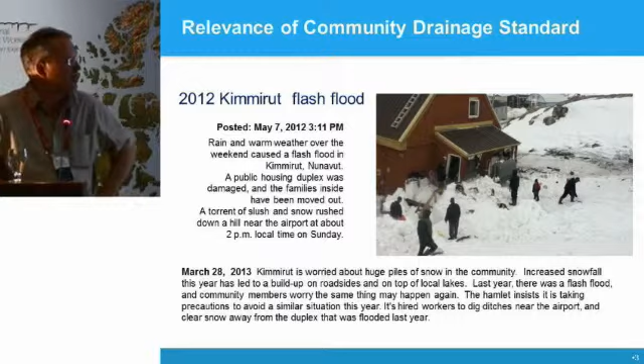But what do we have in terms of drainage systems today? I was fortunately involved with a climate change project in Kugluktuk and had the opportunity to wander around town for days, looking - the engineering side of me - at the drainage system in detail. Kugluktuk has rudimentary drainage in terms of ditches and culverts, but those systems are in various stages of disrepair. So I think it's important to this overall element of drainage that you have the planning and design, but the maintenance will actually dictate the success of this program.

That's why we're developing this standard. We expect the standard language to be this thick and our appendix to be that thick, recognizing that the pullouts and additional supplementary information we can provide to community maintainers will dictate the ultimate success of this standard as we're envisioning it now.

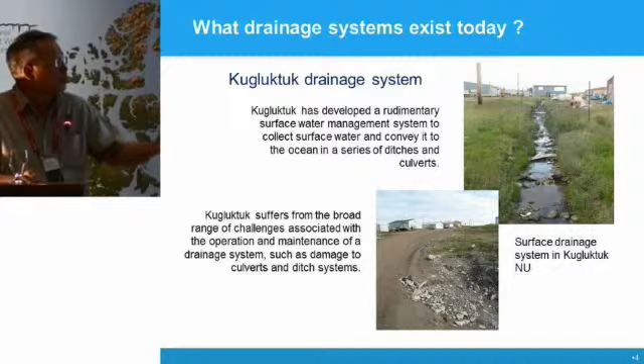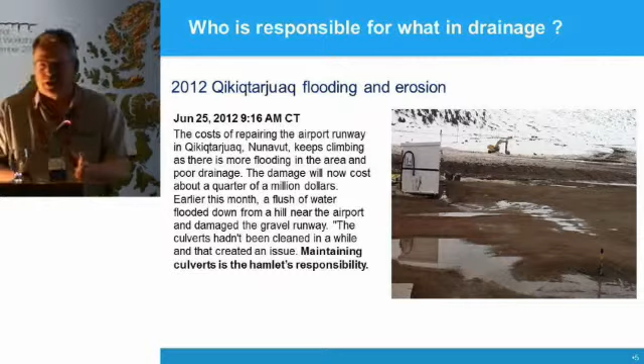But this goes to show in terms of who's responsible - Qikiqtarjuaq flooding and erosion back in June of 2012, they had issues with flooding, talking about damage in the range of $250,000. So regardless of how planners and engineers are involved, it comes down to the community being responsible and having the long-term responsibility for maintaining and improving that drainage. I think that's key to the whole success of our exercise.

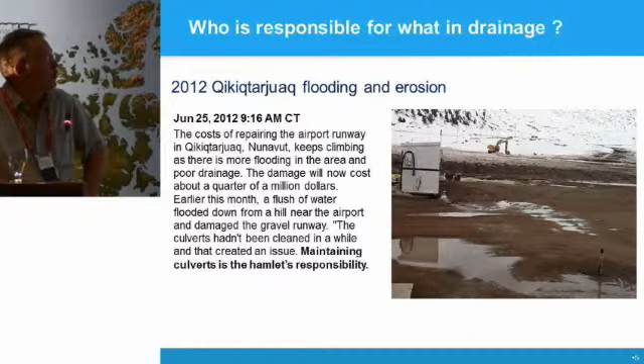So for operation and maintenance - these are shots from around Kugluktuk showing things such as plugged culverts, drainage channels or ditches that are improperly maintained, culvert ends - this is standard stuff. These are the elements we're looking at in terms of trying to bring forward the planning side, which community planning is a fairly well established exercise in most northern communities.

Most northern communities have a community plan that has drainage elements in it, and these plans are updated quite sporadically, but drainage is inherent to them. Now we're trying to take that information, that element, and bring it forward to a new level where you've got information available in the context of a standard.

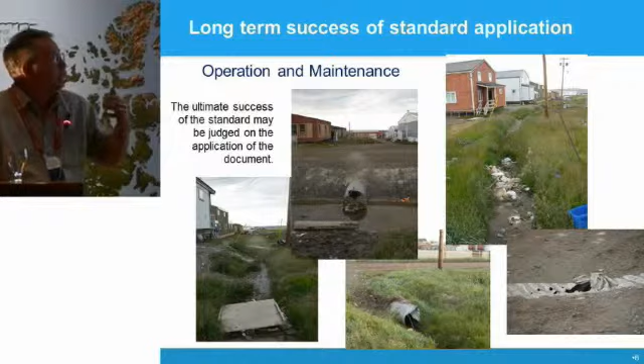As I was saying, there's an integration of existing information - this is the community plan for Repulse Bay in Nunavut, and drainage is a standard part of the language within the community plan. But as we've been talking about, and this was one of my fundamental interests in coming here, is the terrain hazard mapping and satellite imagery that is now available and becomes a tool.

This was part of our learning curve in this process - saying, okay, what do we need in terms of drainage planning and design? The classic approach is let's do a topographic map of the community, send surveyors in to collect sub-centimeter topographic information we can use in the design. But now we're bringing in other elements - what about the permafrost areas or areas prone to erosion? How do we bring those elements in without a significant geotechnical exercise? Well, we've got the imaging now that I think can bring those elements into play.

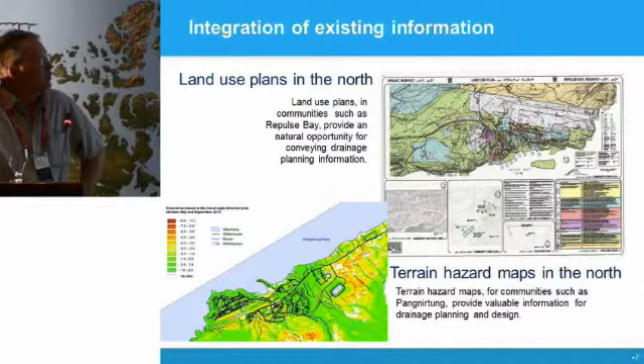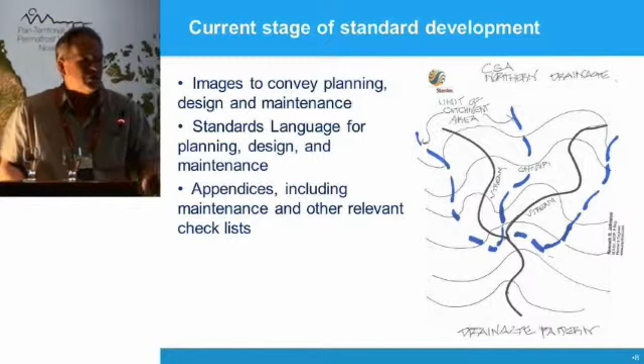So this is really the tail end, and I think I'm pretty much on topic. Coming together with our group, we had the opportunity to meet here in Yellowknife back in August, and we have such a broad range of planners, engineers, and maintainers. We came into the room, we had a draft, and by the end of it, we'd pretty much thrown out the draft. We're not starting from scratch, but we certainly learned in terms of what we're trying to do with our standard documentation and what information we really want to include.

So as it stands now with our committee, we're focusing on imagery to convey the planning, design, and maintenance. Very important, and I think this is where the planning element is, that from a planner's perspective we have to be very, very visual. We want to convey that in terms of understanding and conveying the message. We want to make sure the standards language for the planning, design, and maintenance is appropriate to the actual standards within the CSA context. Again, very important, and we're working on that.

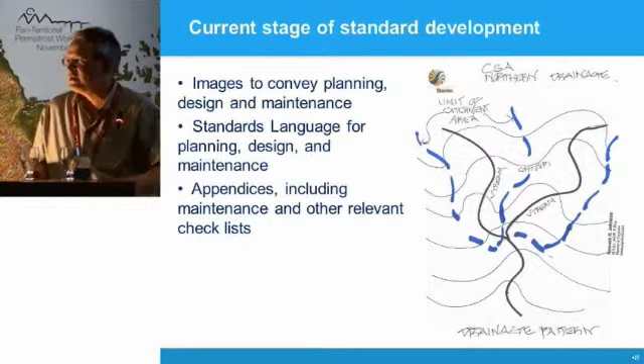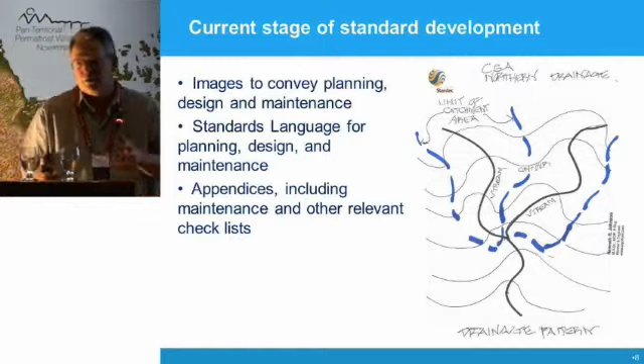But I think where we're really concentrating, or a lot more energy will go, is in terms of the appendices and a lot of pull-out stuff, maintenance and other relevant checklists. And this is where I'll plug - if anybody has any ideas that have just come to mind right now, we would certainly appreciate that input. As we're finding out with our various committee members, we had a drainage standard that one of our committee members brought out, I think for Fort St. John or Fort Nelson, and we had a look at it in the last 10 days and we want to include this as an actual usable document in the standard.

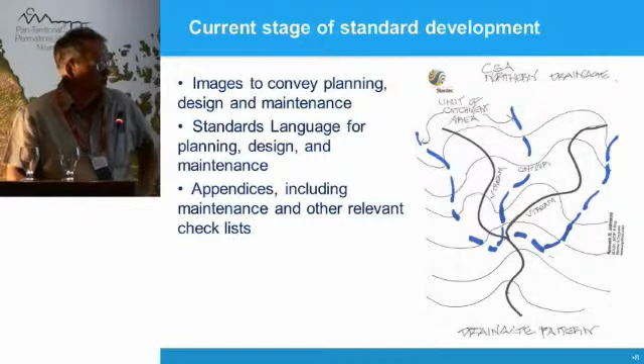And I certainly would like to acknowledge our committee members: Dennis Althouse with the GNWT, Jack Bowers, Yukon Government, Bob Chappell, GN, Ed Cormier, GNWT, John Clark, Williams Engineering, Greg Cousineau, GNWT, Scott Lamoureux, Queens, Ian Robinson, a planning consultant in Whitehorse, and John Watson with the GN. Some of those gentlemen are here today. I won't embarrass them by standing up. And thank you very much for your attention.

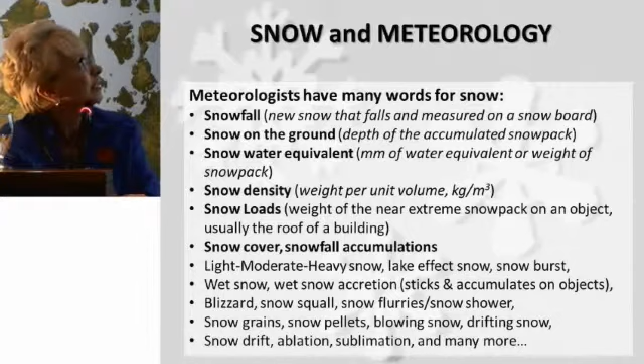This standard has to dance very nicely with the National Building Code of Canada. The National Building Code of Canada is usually adopted by the territories and the provinces, and it gives the specifications for the design of new buildings, brand new buildings.

This standard is dealing with another type of issue. It will have two annexes in it that deal with what to do with the fact that the snow is changing, and is changing quickly. What to do when you're designing new buildings, because that building has to last for 30, 50, 70 years, so you don't want to have it fail on you early.

So this standard is going to focus, though, more on existing buildings. What do you do with those buildings that were designed at a time when the weight of the snow was less, and now it's increasing? How do you protect lives? How do you make that building last a little bit longer? And when should you get up on that roof and take the snow off?

There are two snow terms we're going to use today. One is ground snow load. What engineers typically do is look at the weight of the snow that's on the ground, because that's sort of a constant. Then they use different factors to adjust it for what that snow should do on a roof, because every building's different. Every part of the roof can be different, and the wind can blow the snow around a different way.

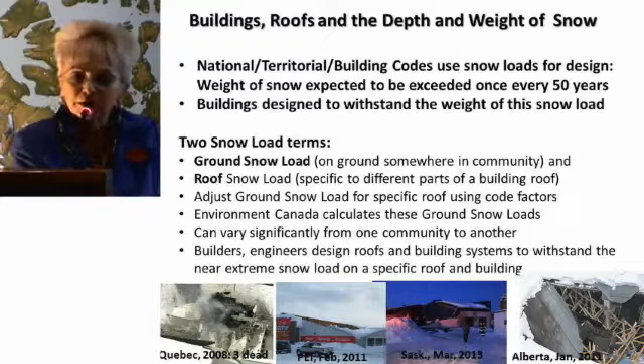Typically in the north, snow has been dry and wind-packed. Not happening anymore in a lot of locations. The snow and the maximum weight of the snow are behaving a little bit like it does in, say, parts of the prairies or parts of southern Canada. It's coming more in episodes now. Snow comes and it goes, and it changes more during the season, perhaps, than it did before, or not as consistently.

So we know that the snow depths are changing in some locations, but not all. They're increasing. Pretty much snow is increasing most places when it comes to extremes. The accumulations, the amount that gathers over the season, the greatest depth you might see is also increasing in some regions. The densities are going up, particularly in the southern parts. The depths are often going up more in the northern parts of the Arctic. As I mentioned, the rain on snow is increasing, but the length of the snow season is decreasing.

And we typically hear the snow cover is decreasing. That means the length of the year we have snow on the ground is decreasing. So people hear that and they go, oh, good, no problem with snow. No, the means and the different characteristics can vary in different directions. But the things that matter for buildings are increasing.

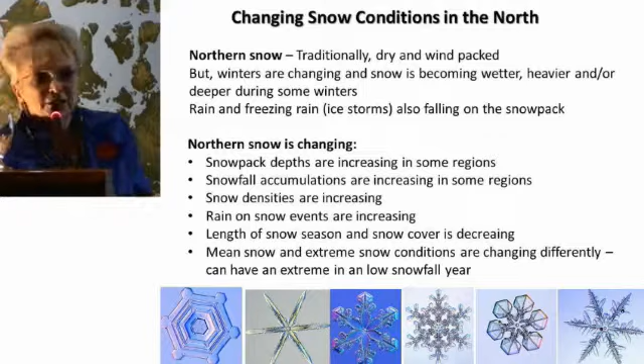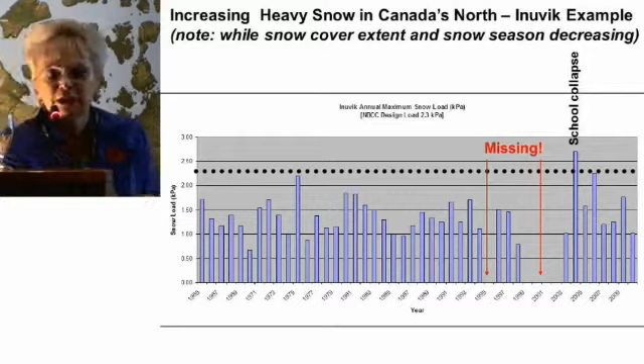Environment Canada has just updated the snow loads that are going into the building code that will come out in 2015. Just looking at the updated snow depth data, there's big changes coming for the north. Some communities aren't changing, but any of those that are going to see a changed weight of the snow that buildings have to be designed to will be looking for increases.

And in Nunavut, 75% of the locations are going up, though with more moderate changes, not as big as in the NWT. So once the next set of studies comes in and looks at density, there's probably going to be more increases coming for subsequent codes. So this is something we're going to have to live with.

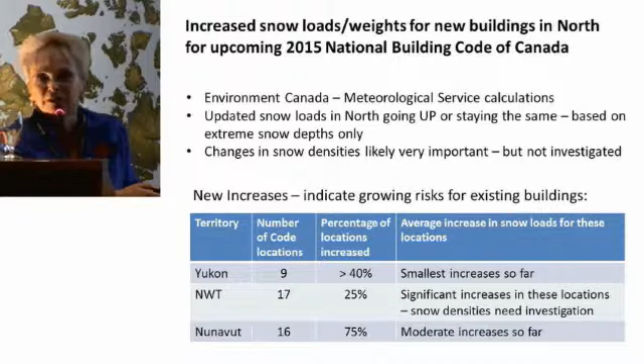And it's particularly an issue for existing buildings. So the crux of the standard is this, when we get it finished, which is quite a challenge: we have to have procedures to reduce our vulnerability.

If we have an existing building that was designed to withstand lower weights of snow, there are things we have to do to make sure that people don't get killed when the roof collapses, or the building doesn't have to be replaced prematurely, because that costs a lot of money.

So the first thing, we have sections that will deal with how to reduce the risk, how to maintain that roof, how to make decisions on that building that are going to make sure it can withstand those increasing loads where we can. Then we need procedures to monitor.

We need to know, not every year is going to be a heavy snow year, but when it is, we need to know when we're in trouble. When is that roof at risk of potential collapse? So that involves the sections on monitoring, watching the roofs, and detecting when you're at a critical point where you're at risk of collapse.

And then there's another section on how to remove the snow from the roof, because if you take the snow off the roof, your risk goes way down. Mind you, the risk to the person taking the snow off the roof goes way up, because a lot of people do slip and fall off roofs. There's probably as many fatalities from removing snow as there can be from the roof collapsing. So it's a real tight balance there.

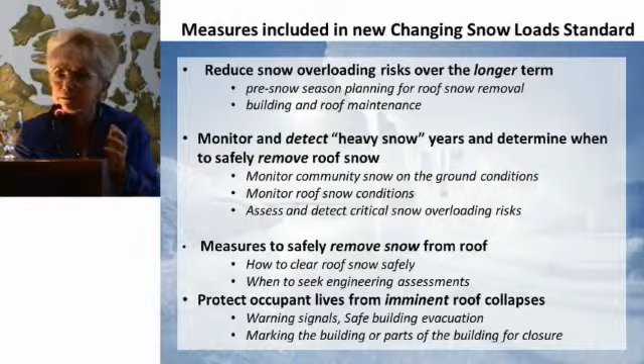So these will be the main considerations in the standard, because we have types of problems that are fast. When a snow load increases, a building can be at risk of collapse quickly, and then there's the long-term things that we can do.

So some of the things that will be there: we will have to link, I think, with other projects to assess each building, because each building will be vulnerable in different ways.

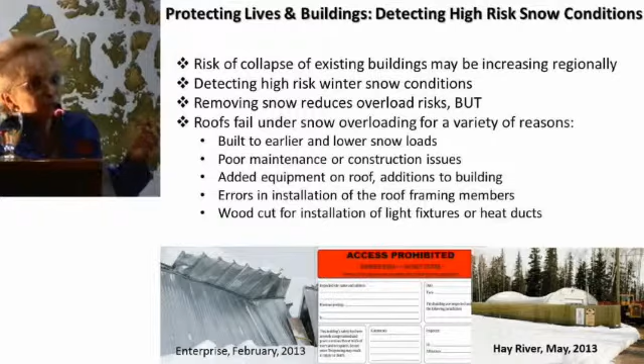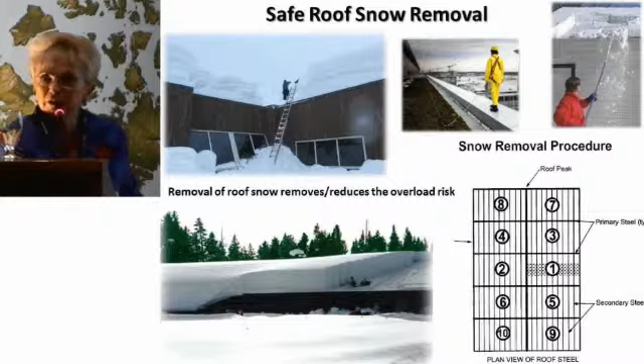As I say, you can see here the graphics on how to safely remove the snow from the roof. You can see some of the warning signs. There'll be some graphics in there on what to look for when it's getting to be pretty darn unsafe.

And one of our big challenges is going to be snow data. It's variable quality, short records, sometimes not available at all in locations, or not the right kind of snow measurement. So this is one of the biggest challenges in being able to detect when we may have a problem in a community for different buildings. So that will be a challenge.

Snow densities are variable, and that's a problem. They're usually not monitored. With specific data, can we get that? We don't know what to do with rain on snow as yet. That's going to be other building codes to deal with that one.

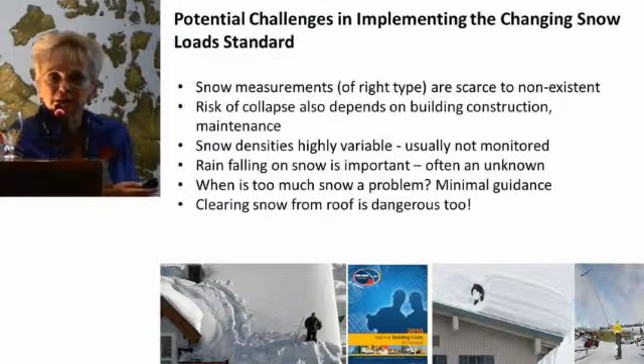And we are still struggling with the question of when is snow too much snow, and when should you be up on that roof clearing it? So there's a lot of challenges that lie with this standard. So I'm going to close it at that point.

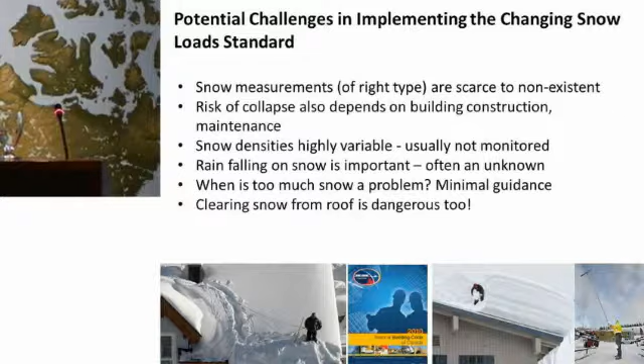They're major. Another one we had last winter in Fort Simpson, where we had severe stresses on some of the roof trusses, and the school had to be evacuated - the kids had to be taken out of school for a few days until we could assess and beef up some of the trusses there. So there were lost days at school, parents who had to deal with daycare, all these types of things. It's a major impact when you have a roof collapse on a public building.

And moving on to our next speaker, Antoni Lewkowicz is professor in the Department of Geography at the University of Ottawa. He's been a permafrost researcher for more than 35 years. His major interests have been in the distribution and characteristics of permafrost and the impact of climate and other environmental changes. He is the chair of the working group for the standard Moderating the Effects of Permafrost Degradation on Existing Structures. Tony?

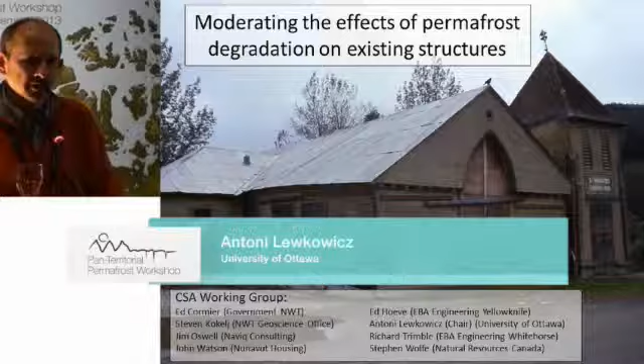Thanks very much, and I would like to immediately acknowledge the efforts of the other members of the committee or the working group that you can see at the bottom: Ed Cormier, Steve Kokelj, Jim Oswell, John Watson, Ed Hoeve, Richard Trimble, and Steve Wolfe.

And as was said earlier, those of us who are involved with CSA for the first time have learned that there are all sorts of rules about the way CSA works, and one of the ways they work is to make sure that the committees or working groups involved in developing a standard represent the different stakeholders. So in this case, we have a mixture of researchers, engineers, and users on the working group, and it's important that we maintain that. So all of us are contributing to the development of this potential standard.

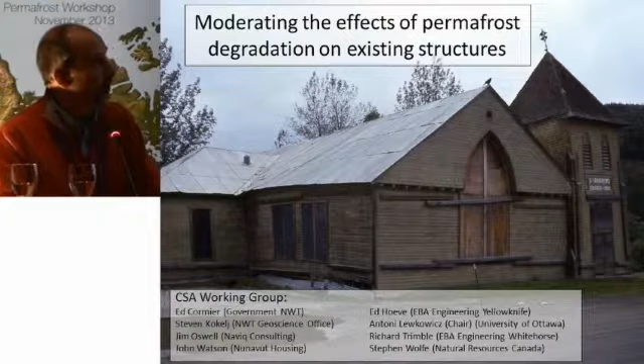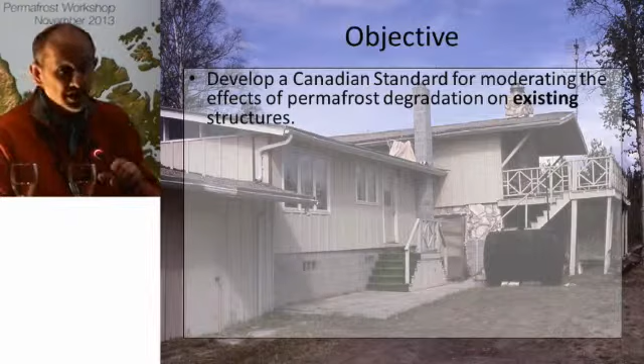So our objective, and here we see a building in Fairbanks that is suffering problems because the original construction was done on the assumption that birch here would mean there was no permafrost. Unfortunately, that didn't prove to be the case. So our objective is to develop a Canadian standard for moderating the effects of permafrost thaw, permafrost degradation, on existing structures. And it's important to know that it's existing ones - we're not trying to develop something for buildings that will go up in the future.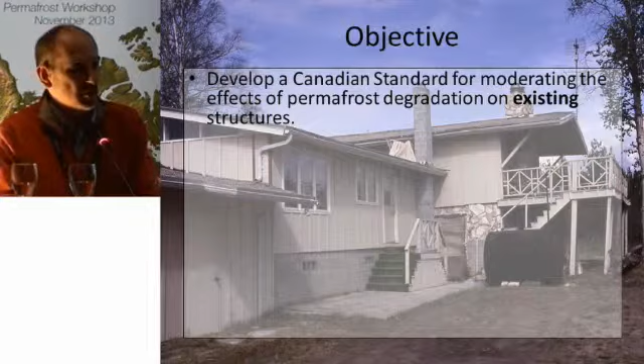That standard is basically going to apply to two different groups of foundations, either shallow or deep. In terms of shallow foundations, we have footings that either do or do not have a ventilated airspace. We have slab on grade with no airspace, typically used for construction where we have heavy machinery or need on-grade construction and can't elevate it in any way. Or deep foundations, such as adfreeze piles, which means they're put into the ground and the freezing back of material around them, or simply bashed into frozen ground, provides much of the strength.

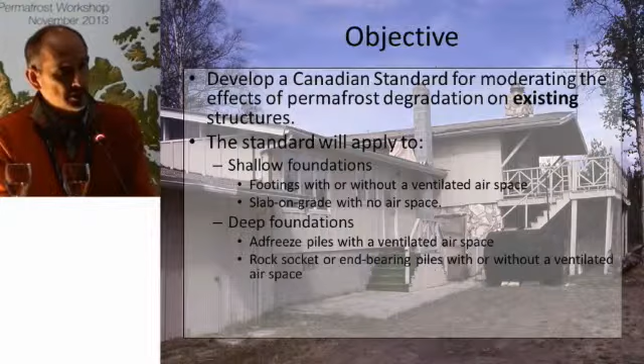Or rock socket or end-bearing piles, where the piles go deep enough into the ground that they're on solid material at the base, such as bedrock. So these are the foundations that basically exist in the north, and they're the ones that we're trying to develop a standard for. It's currently in draft form, and so further amendments are expected.

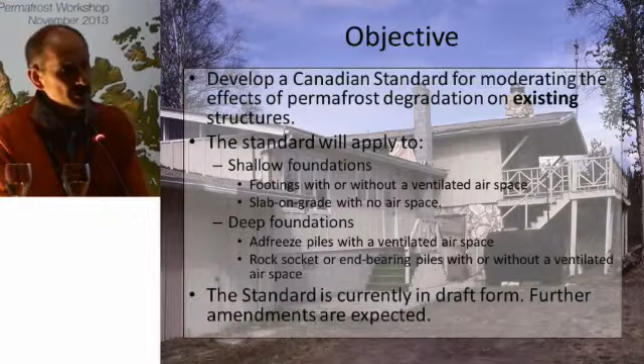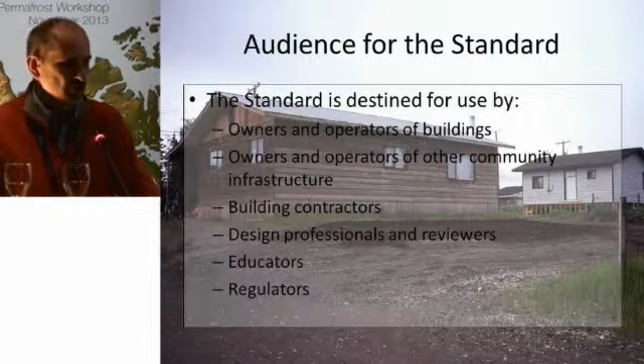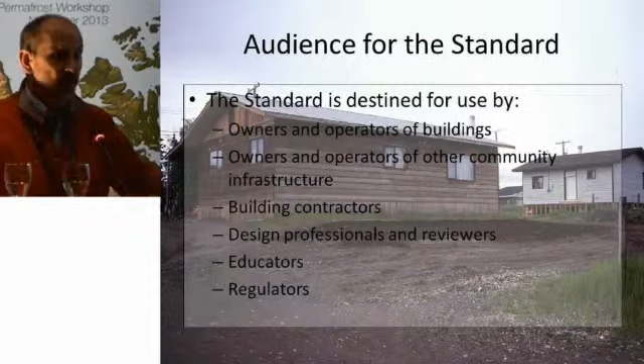What I show you today may or may not end up in the final version, but I expect it to do so. The audience for the standard is something we worked on for some time and with considerable discussion. Was it just for technical people? The goal was definitely not to make it just for people already very familiar with permafrost problems, but more like perhaps the audience in this room—owners and operators of buildings, owners and operators of any other community infrastructure, building contractors, design professionals, educators, and regulators. That represents a pretty good cross-section of the individuals listening today.

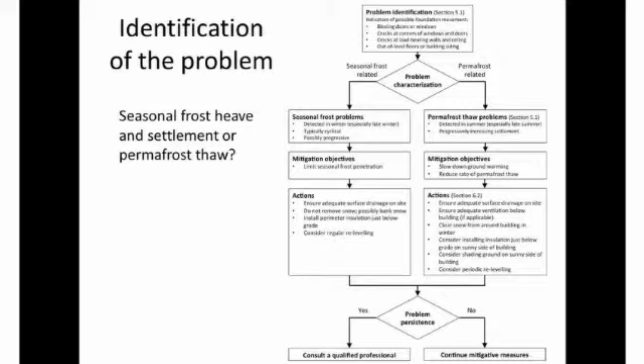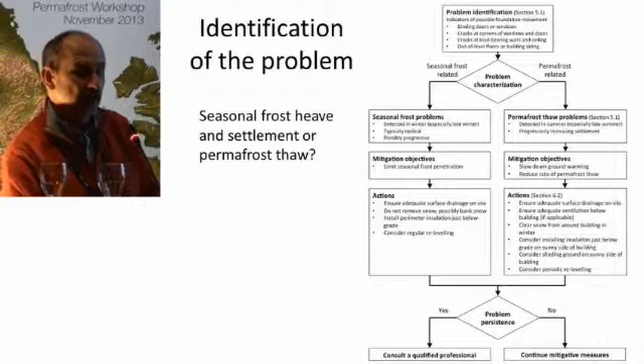What are the things you're noticing about this problem, such as binding doors or windows, or cracks at the corners of windows and doors, perhaps cracks in load-bearing walls, and so on. Those are often the first sign that you've got an issue with potential permafrost thaw. However, it could also be related to seasonal frost heave rather than permafrost. So we have to make sure you correctly identify it, because what you do for seasonal frost heave may be exactly the opposite of what you'd do for a permafrost thaw problem. It's very important that this problem characterization is correct.

The standard doesn't really deal with seasonal frost heave, except at this point—or the proposed standard doesn't deal with it, except to say that you detect frost heave generally in the winter, especially in late winter. It's typically cyclical, so it'll come and go, but it might be progressive—you can get jacking up, and then you get progressive heave. The goal would be to limit seasonal frost penetration at that point.

Actions might include ensuring good surface drainage, not removing snow, perhaps even banking snow, installing perimeter insulation just below grade, or considering regular releveling if you have that ability in the building.

If you have permafrost thaw problems, then you're likely to detect them in summer, particularly in late summer, because that's when the active layer reaches its maximum depth. They're likely to progressively increase, whereas seasonal frost may or may not. The mitigation objectives should be to slow down that ground warming and to reduce the rate of permafrost thaw. So we have warming first and then thaw that will take place afterwards.

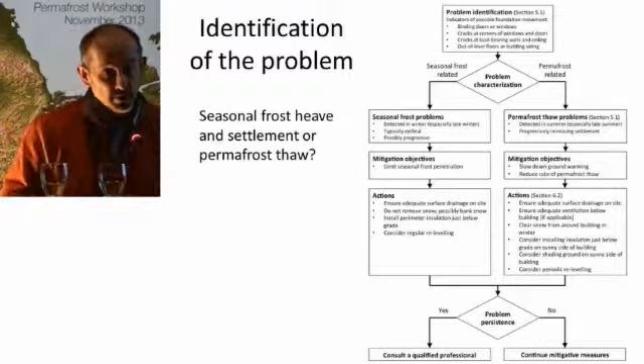So this is, if you like, a menu for construction, for operation. If this works, great. Otherwise, you need to do something else. And these are the measures that are going to be covered in the standard and their possible application.

So we have here the two groups of foundations: shallow foundations and deep foundations. Surface footings, buried footings, or slab on grade for the shallow; adfreeze and grouted end-bearing piles for the deep. Those three are the ones I've already discussed: shading, drainage, snow management.

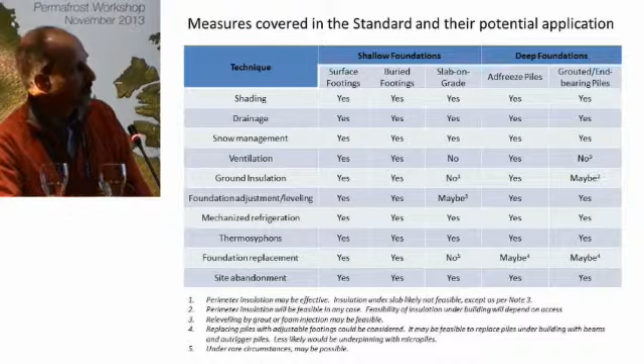All of them apply to all of those different foundation types. But as we go down the various other things you can do, such as ventilation, ground insulation, foundation adjustment and leveling, you'll start to see that they don't necessarily apply. You can't ventilate a slab on grade. That's pretty obvious. Mechanized refrigeration can be used everywhere.

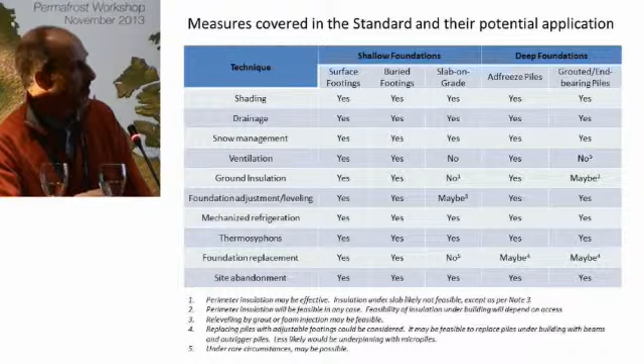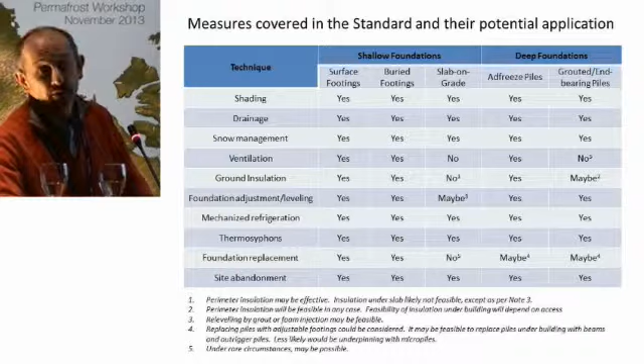Thermosiphons, that we've also heard about this afternoon, can be used everywhere. Foundation replacement is rather difficult on slab on grade, although under rare circumstances it might be possible if the building is valuable enough. And what is the last one? Site abandonment, because in some cases you just can't solve this problem.

The challenges of developing this standard are, first of all, how do we balance the individual nature of problems in an individual building? Can we define things sufficiently that they're general enough to apply across different buildings, different foundation types, yet sufficiently specific that we don't just say, well, invent a wheel, make sure it's round and turns. We need something a bit more specific than that.

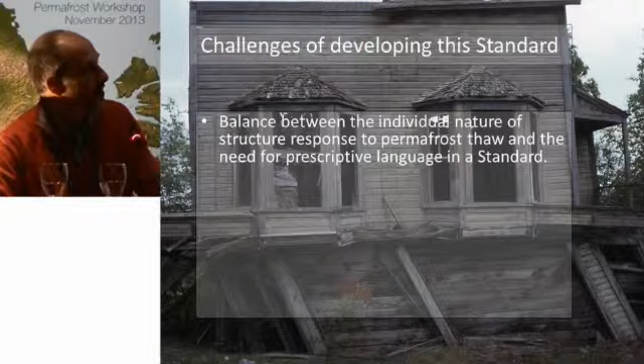I think that was in fact the biggest challenge so far of the working group: to even decide whether this should be a standard or whether it should be something more like guidelines. So we're going to try to balance appropriate technical language with enough information so that lay audiences can still understand what we're saying. And I think that's a second challenge.

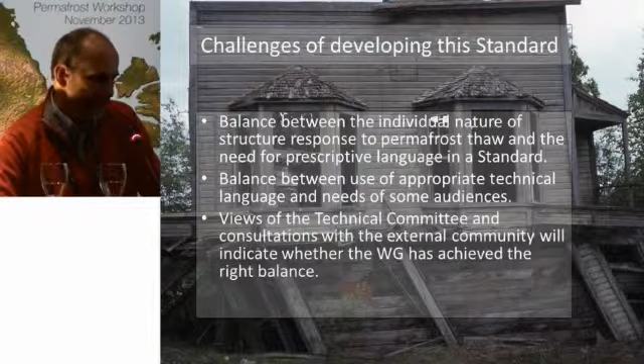Ultimately, when you produce a draft standard, it goes out for consultation in the community. The first consultation was in fact the actual technical committee that will look at the draft standard we're proposing, and either approve it or not. Their decision will also indicate whether we've reached the right balance, as I hope will all of your decisions.

So when we put this out for review, we will look forward to getting your reaction back to see whether we've achieved the correct balance.

So I want to thank all the working group members who have volunteered their time, energy, and experience to do this. And I want to remind them that at the end of Thursday, when all the rest of you are going to the bar, we have a meeting. Thanks very much. Thank you.

And thank you, Tony. You just reminded me that I shouldn't stand between this audience and Miller time, so we'll finish this up.

Our last speaker on working groups is Don Hayley. Don is a consulting engineer who focuses solely on Arctic regions. He was a senior principal of EBA Engineering Consultants for 45 years, retiring as Director of Arctic Resource Development in January 2013. He's an active volunteer on committees for Transport Canada and the Canadian Standards Association that address challenges associated with northern roads and buildings. Don is the chair of the working group for buildings and permafrost support on thermosiphon foundations. So, Don?

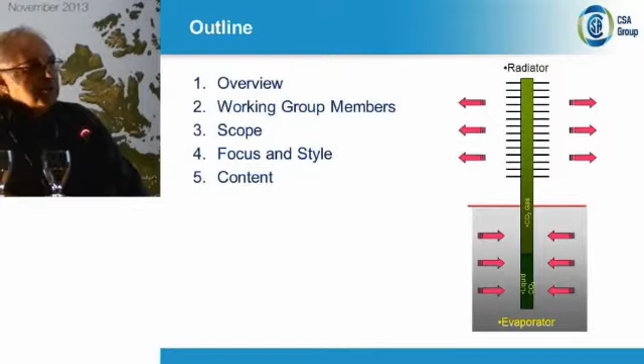We've heard from Brent Walls something about thermosiphons and how they work. Most of you, I'm sure, have seen thermosiphons. They're pretty much in use all across Canada now and have been for probably the last 20 to maybe even 30 years. I won't go into details on how they work, because basically Brent has told you that story.

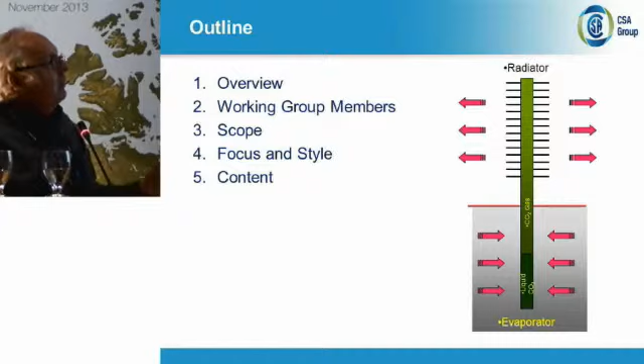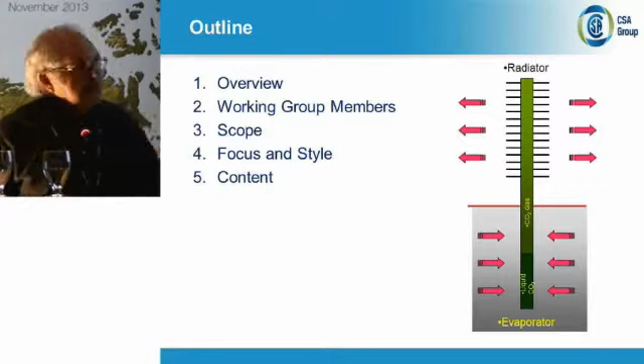What I'm going to tell you is a bit of an overview of what we're doing with this standard and why we're doing it, who the group members are, what the scope of the standard in fact is, and who we're focusing it on, and a little bit about the content. I'll have to skip over the content a little fast, but the entire standard is in fact in a package on the front desk.

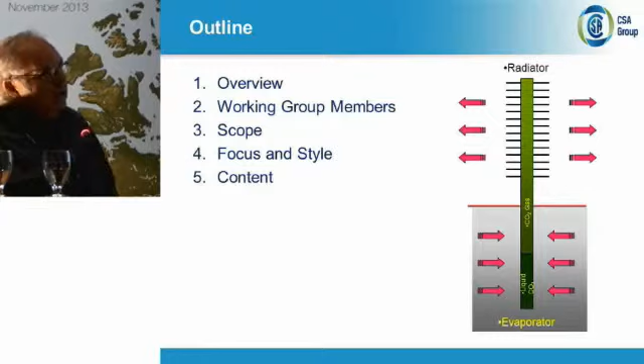So let's look into the past first of all to see where we're in fact going with this standard. The concept of using...

thermosiphon-like heat pipes to effectively accelerate cooling in civil engineering structures, the first major use goes back to the Alyeska pipeline, which was built in 75 to 77. There they used a heat pipe called a cryo-anchor, same principle as the thermosiphon, but it's charged with ammonia instead of carbon dioxide. It was used to cool the piles that support this structure because the piles are heavy and they were subject to creep.

Now, just to go back to a question that was asked of Brent, McDonnell Douglas Astronautics were the first people to actually build this type of thermosiphon called a cryo-anchor, and they brought them to the market, civil engineering, and they sold them purposely as a methodology for stabilizing power poles in the ground. So there's a history there of that, and they've been used to stabilize power poles, certainly in Alaska, for quite a long period of time.

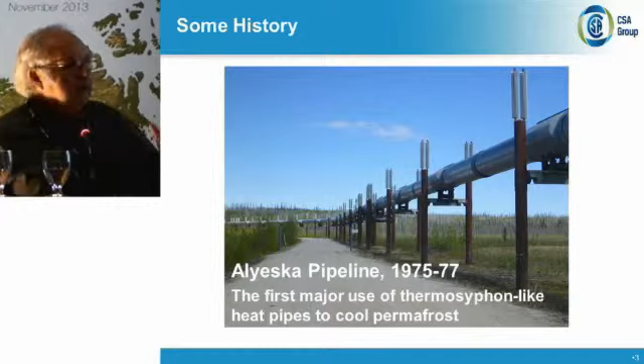So when we go to Canada, we move 30 years into the future, and we look at how they're being used now in Canada on a routine basis, and that was really our task - to look at that and to come up with a standard that now makes sense where no standard currently exists.

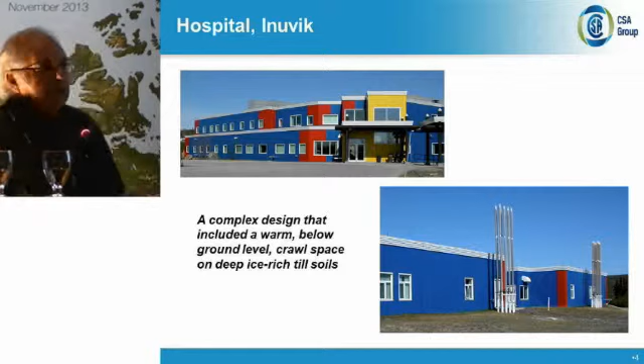There's been a couple of high-profile projects in northern Canada that have relied on thermosiphons for their foundation design. This is the hospital in Inuvik, which has been in service now for a little over 10 years, and it in fact relies on a thermosiphon foundation design system, and it's quite a complicated foundation design. It's been well written up in the geotechnical engineering literature, and two papers were presented at the International Permafrost Conference in Fairbanks about 4 years ago.

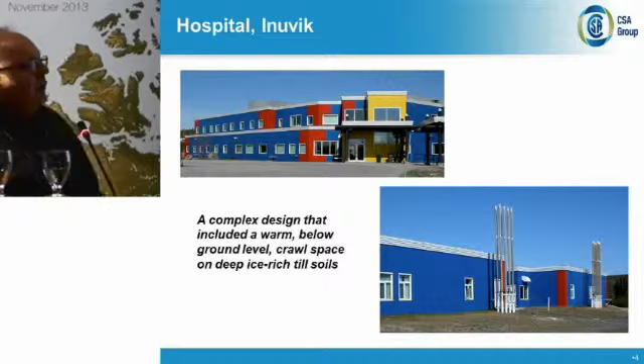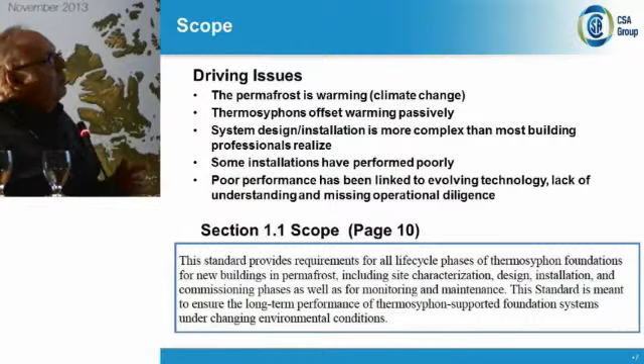So when we sat down to put together what the scope of our standard is going to be, the first question is, why are we doing this, and what's driving us the issue to actually have a new standard? And of course, the first one is that the permafrost is warming. The second is that thermosiphons offset the warming passively, so they don't require any power to operate.

The system design installation is more complex than most building professionals realize, and this is very clear that when you start delving into what it takes to actually design, implement a program, and construct the building, it is very complex with a thermosiphon system as your primary support to preserve permafrost.

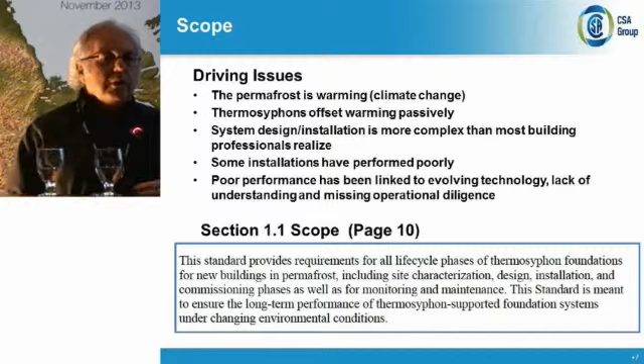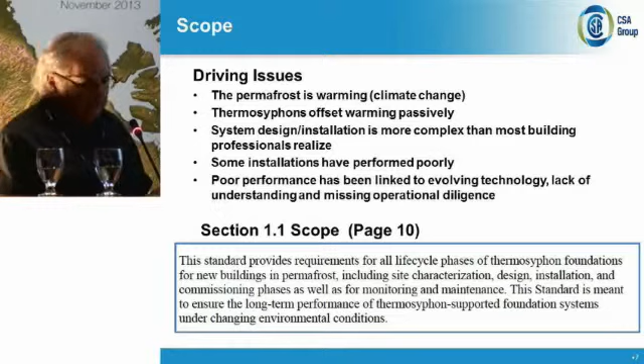And some installations have performed poorly and given thermosyphons a bit of a bad reputation. And the poor performance that's come has been linked to, really it comes down to the evolving technology - we're learning more as time goes on. A bit of a lack of understanding of how these systems should be designed from a systematic standpoint, and what's missing is often the operational diligence, and that's the whole monitoring side of them. You don't walk away from a thermosyphon system after it's in service and assume it's going to operate automatically till the end of life. So what we've written here is a scope that we agreed to, and is a scope that's in fact the standard.

So our focus group, who's going to use this? We decided that it would be the planners and land developers, and those are the people who have the real interest in the building, in the site and the building over the long term. They're the people that have to live with the results of what we as design professionals give them.

The design professionals working in the north, the architects, civil, and geotechnical engineers involved in the building design business, the contractors who actually put these systems together, the thermosyphon fabricators and installers - we heard from Brent that there's really only one supplier in Canada now, and that's Arctic Foundations of Canada. And finally, it's the building owners, because without them buying into this standard, the ongoing monitoring simply will not be done. That's been part of the problem with poor performance of some installations.

But we have some scope exclusions as well, which I want to mention particularly - we are not dealing with retrofit of existing buildings. So these are new buildings we're talking about, not to say it can't be done. It is not a common practice. There are no successful projects we can point to where this has in fact been used as a retrofit to an existing building. So we're staying away from retrofit. It's not something we can really conceive.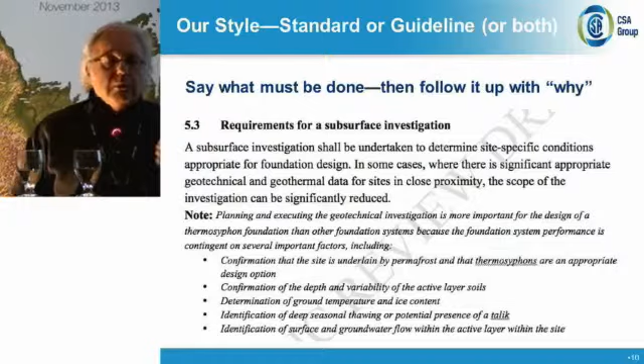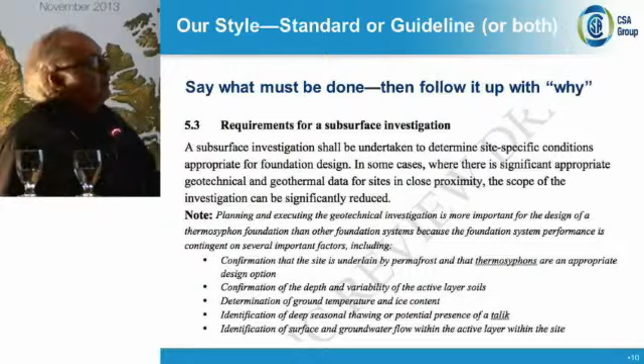and agonize a little bit about whether we should be really writing a guideline or a standard. In the end, we compromised with our masters at CSA, who really had in mind that this had to be a standard. But to go from absolutely nothing to a standard, that's a big step. So what we did in the end is we adopted a text philosophy that says, say what must be done, but then follow it up with why we think it should be done. That's the type of text you'll see in our standard.

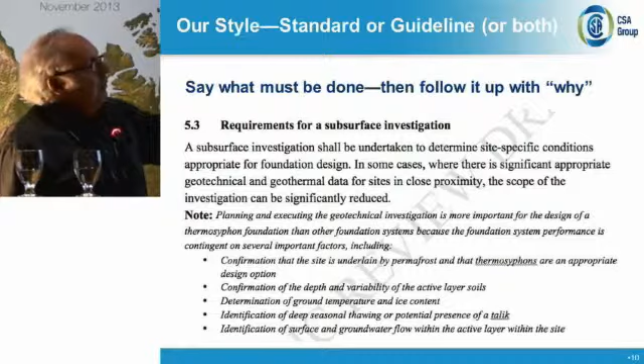For example, under subsurface investigations, it shall be undertaken - a subsurface investigation - but under the notes, it says why it needs to be done. So that's the approach we've taken.

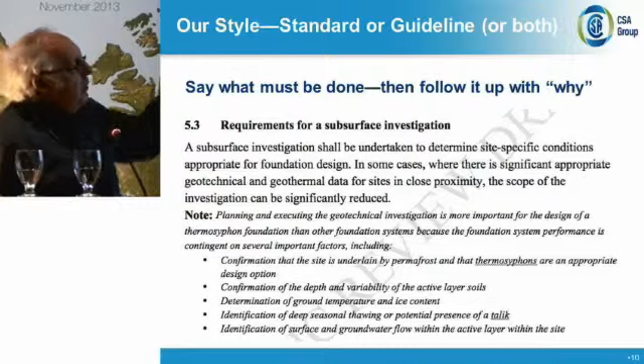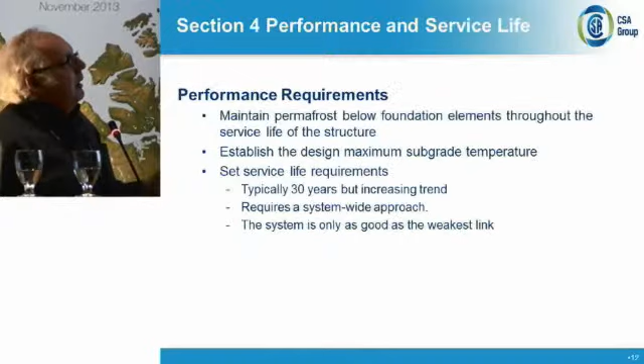In terms of the sections here, we've got a background section, references and all that good stuff. We have performance requirements in the next section, and service life. I'll talk about service life in a minute.

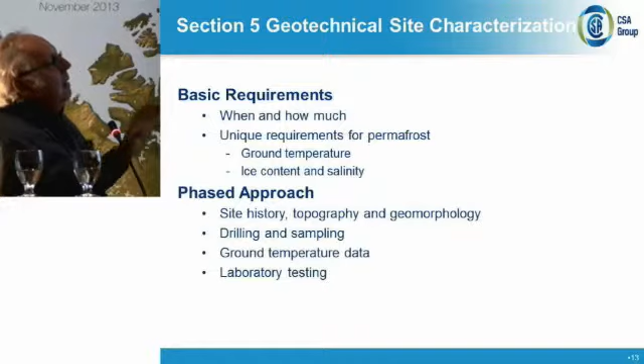We have the geotechnical site characterization, what you really need to do, and take a phased approach to it. The system design that we start with fundamentally - you need to ask yourself, is this the right system for this particular building? So we give some guidance on that.

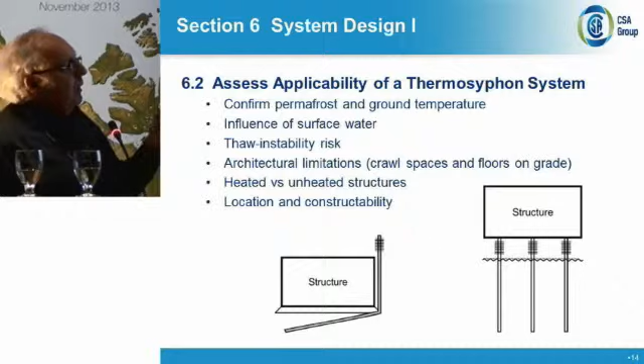The thermal analysis and modeling gets a lot of coverage. We put a lot of effort into that because we think that in some projects that has been missing or not done adequately. And we talk about the analytical tools available to the designer.

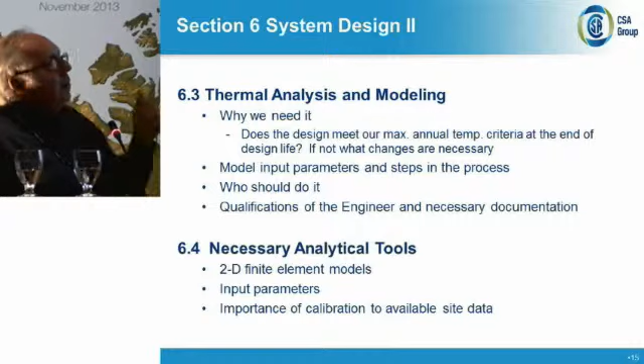Now, climate parameters are very important, and we really stress climate parameters. We stress that we have to know the lifespan of the proposed building. In the case of the Inuvik Hospital, it was clear, we were told 30 years. New buildings now are somewhere between 30 and 50 years, but that decision has to be made by the owner of the building.

And then we have to look at the input that we put into our thermal analysis to represent the climatic conditions over the life of the building, not only the trends, but also the extremes, because we have to handle both in our design. For that, we basically adopt and follow the procedures laid out in this CSA guide, which is 2 years old now, and that many of us in this room worked at preparing, and we feel it's an excellent place as a first start. Complex buildings, you may have to do more, but certainly for an average building, it's a great start.

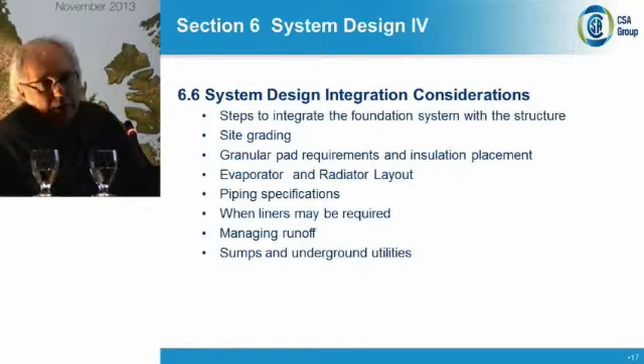The system design considerations are all covered - how the system fits in with the rest of the building. It's in there in a section. The construction is dealt with under the site preparation, the timing, when to put them into place, and how to install them. The monitoring plan.

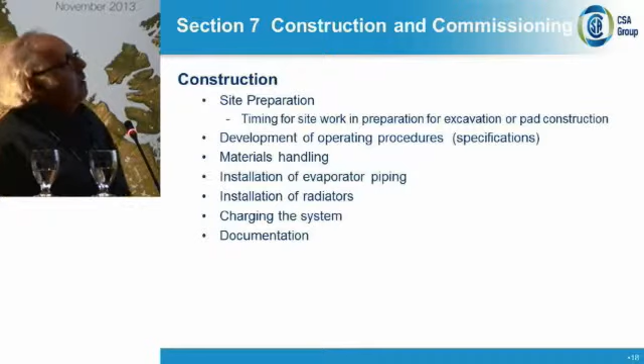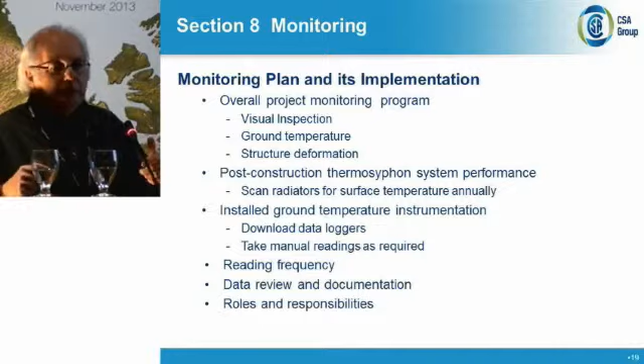Now, monitoring plan and its implementation is very important. Some people will say, well, why aren't you dealing with maintenance? Well, with a thermosiphon system, there really is no maintenance. It's just a matter of monitoring. They either work or they don't. So you have to monitor to ensure that they keep working.

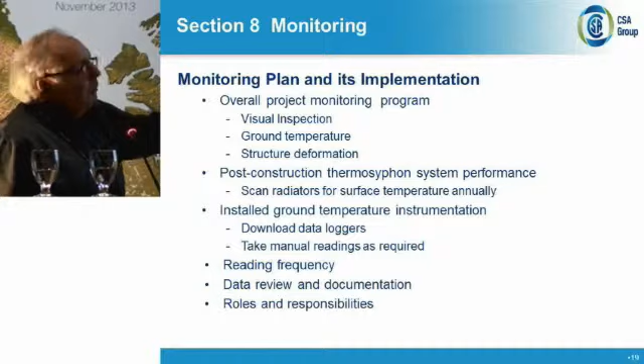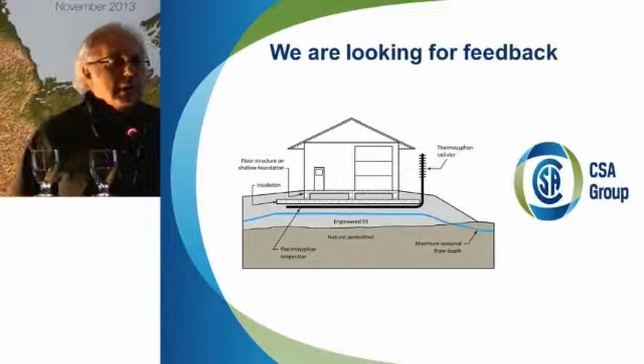So we end up with some annexes and some information tied to the end, and now we look for your feedback. It's out there for your review, your comments. Take it with you to those that you know are actively using thermosiphon systems, and we'd sure like to hear your feedback before we go to the next step. Thank you.

Thank you, Don. I'm really pleased to see that our first standard is out for public review, and I would encourage everyone who has an opportunity to go take a look at that. We would really appreciate your feedback on it, because hopefully it'll be something very useful for the design community and building owners in future. At least for the moderate buildings - the more complex ones certainly might be a challenge right now.

Another comment I'd like to make - there was a reference there to site development. With permafrost sites, or sites susceptible to permafrost, you may only get one chance to get that site properly prepped to get a thermosiphon foundation in without having to take extraordinary measures. So I don't think enough can be said about how you approach the site to begin with - whether you strip it or what you do - and prepare it before you put your thermosiphon foundation in. Because if you're a developer or contractor, and there's an expectation that the building will be completed on a certain schedule, and all of a sudden you lose that site for a period of a year while you restabilize the permafrost, there's going to be some real concerns with that. So I can't emphasize how important that whole approach to the site is in the beginning.

So with that, I'll open up the floor to questions on any of the topics you've heard today. If there's any questions, feel free.